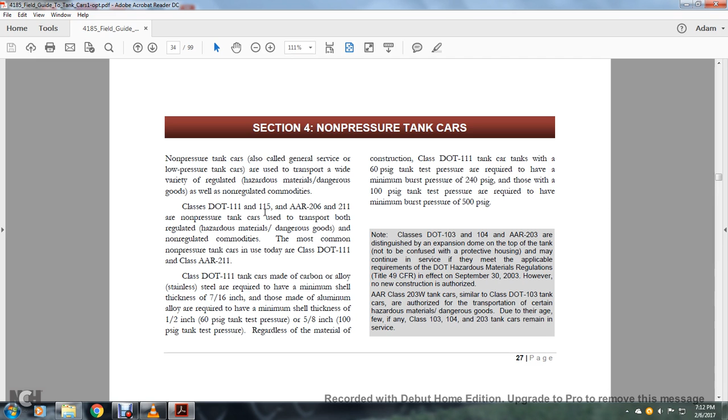Association of American Railroads Class 203W fusion welded tanker cars, similar to Class DOT 103 tanker cars, are authorized for transportation of certain hazardous materials and dangerous goods. Due to their age, few, if any, Class 103, 104, and 203 tanker cars remain in service.

Association of American Railroads Class 211 tanker cars are similar to Class DOT 111 tanker cars, but certain exceptions must be built according to the applicable Department of Transportation Canada specification AAR 211A100W1, or the tanker car must be built to meet the requirements of specification DOT 111A100W1. The main difference between the AAR tanker car and its DOT specification counterpart lies in these requirements.

Classification AAR 211 tanker car tanks require only partial post-welded heat treatment at the time of construction. Class DOT 111 carbon alloy steel tanks with welded attachments must be post-weld heat treated as a unit. Tanks made of aluminum alloy are not allowed to be post-weld heat treated.

Class AAR 211 tanker car tanks constructed with carbon alloy steel do not require radioscopic examination of welded joints. However, welded joints on aluminum tanks must be examined. Additional special fittings on the AAR cars are included to meet user needs.

Non-pressure cars have low-profile manway nozzles on the top of the tank, equipped with a gasketed hinged bolted manway cover. The cover is opened for loading and unloading and for access into the tank for maintenance. Other styles of manway covers, such as those on sulfuric or hydrochloric acid tanks, are semi-permanently attached to the manway nozzle and/or equipped with a smaller gasketed hinged bolted fill hole with a cover that opens for loading and unloading.

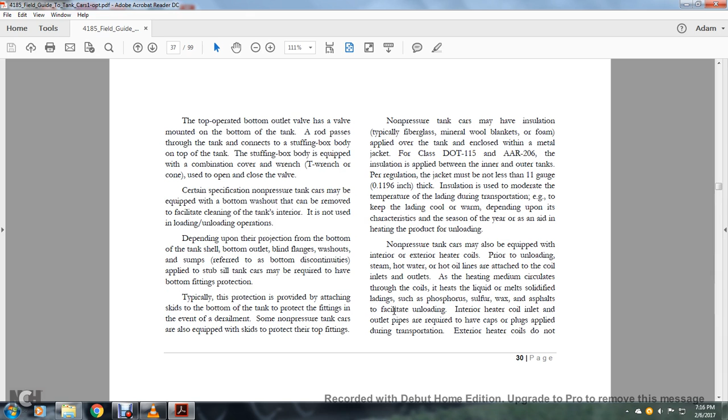See page 38. The top-operated bottom outlet valve has the valve at the bottom of the tank. The rod passes through the tank and connects with the stuffing box body at the top of the tank. The stuffing box body is equipped with a combination cover, a T-wrench, and a cone used to open and close the valve.

Certain specification non-pressure tank cars may be equipped with a bottom washout that can be removed to facilitate cleaning of the tank's interior. It is not used in loading and unloading operations.

Depending on their protrusion from the bottom of the tank or shell, bottom outlet, blind flange, washout, and sumps, referred to as bottom discontinuities applied with the stub sill tank cars may be required to have bottom fitting protection. Typically, the protection is provided by attaching skids to the bottom of the tank, protecting the fittings in the event of derailment. Non-pressurized tank cars are also equipped with skids to protect fittings from the top.

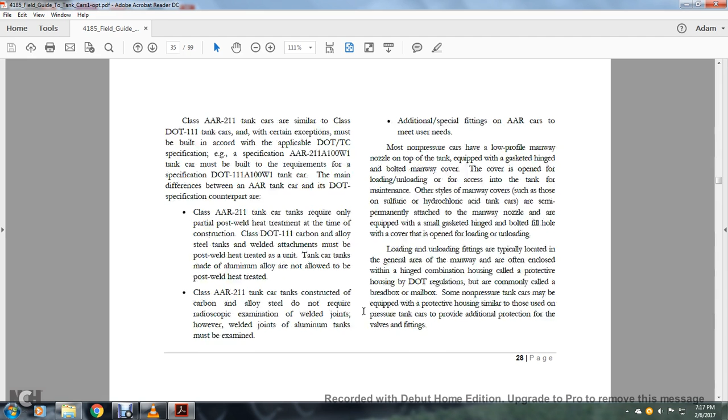Non-pressure tanks may have insulation, typically fiberglass, mineral wool blankets, or foam applied over the tank and then closed with a metal jacket. For Class DOT 115 and AAR 206, insulation applied between the inner and outer tank per regulation with the jacket may not be less than 11 gauge thickness.

Insulation is used to maintain lading temperature during transportation, keeping the lading cool or warm depending upon the characteristics and season of the year, and also as an aid for heating the product for unloading.

Non-pressurized tanks can also be equipped with exterior heater coils prior to unloading. Steam, hot water, and hot oil lines attach to the coil inlet and outlets. The heating medium circulates through the coils and heats the liquid or melts solidified lading.

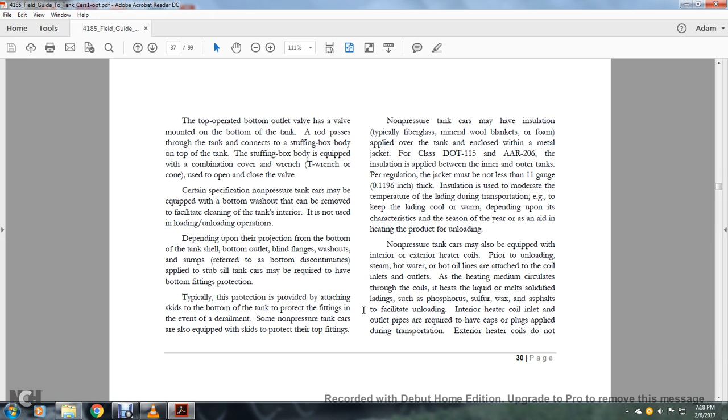For phosphorus, sulfur, molten wax, and asphalts to facilitate unloading interior heating coil inlet and outlet pipes are required to have caps and plugs applied during transportation. Exterior heater coils do not require caps. The car must be stenciled: exterior heater pipes, no inlet or outlet pipe caps required.

Some non-pressure tanks are equipped with electrical resistance heater systems in place of heater coils.

Non-pressure single-unit tank cars may be divided into two compartments by inserting ellipsoid heads into the tank shell. Heads must be concave at the lading of each compartment, or by joining separately constructed tanks to make a single car structure.

Each compartment will have its own loading and unloading fittings and pressure relief device. These compartments must be identified numerically, beginning with the B end, the end of the car with the handbrake wheel, and numbered consecutively toward the A end without the brake wheel.

Note that unlike highway cargo tanker cars, tank car compartments are not constructed by applying interior walls within a single tank. Further, unlike some cargo tanker cars, they do not have interior baffles to control lading surges.

Your Class DOT 115 and AAR 206 non-pressurized tanks have interior container tank construction with carbon steel, alloy stainless steel, manganese molybdenum steel, or aluminum inner tank supported within an outer shell tank that is not jacketed.

The annular space between the inner tank and the outer tank contains insulation. These cars are commonly referred to as tank within a tank, as the outer shell tank is constructed in the same manner as the tank of the car. The outer tank is not merely a metal jacket covering an insulated tank.

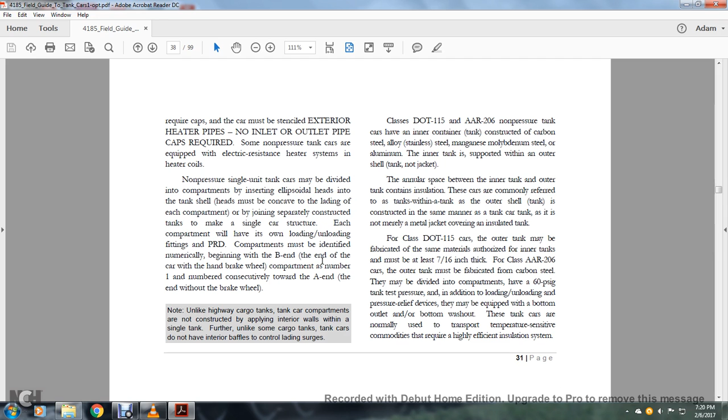They may be divided into compartments having 60 psig tank pressure, with additional loading and unloading and pressure relief devices. They must be equipped with a bottom outlet valve and/or bottom washout. These tank cars are normally used in transporting temperature-sensitive commodities requiring high-efficiency insulation systems.

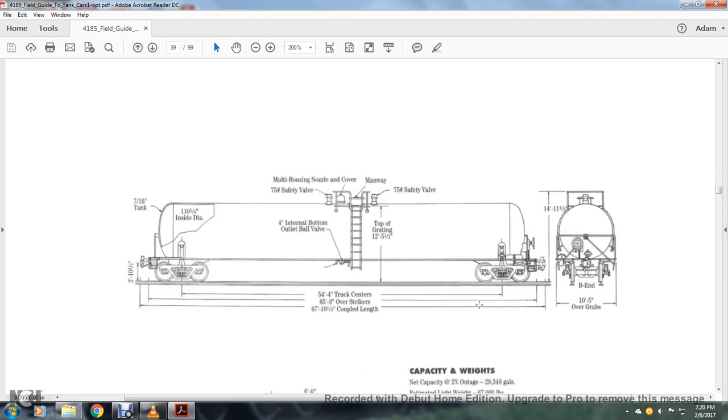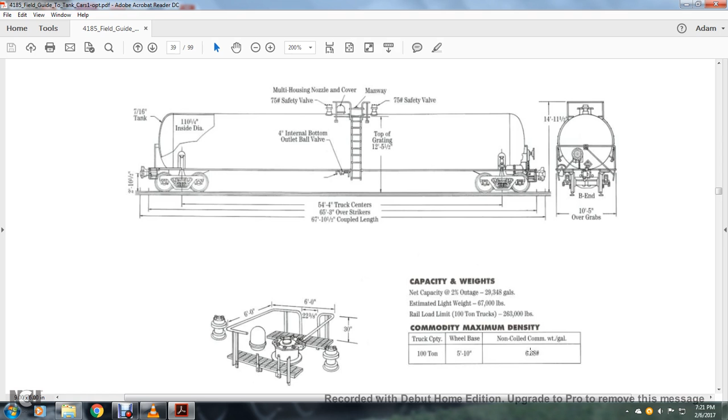Capacity and weight: net capacity at 2% outage of 29,348 gallons. Estimated light weight 67,000 pounds. Railroad load limit 100-ton trucks, or 263,000 pounds. Commodity maximum density, truck capacity 100 tons. Wheelbase 5 feet 10 inches, nominal. Weight of the gallon 6.68.

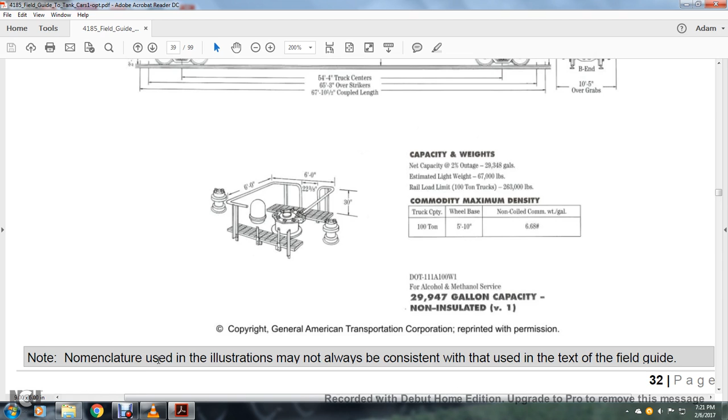Note that nomenclature used in the illustration may not always be consistent with that used in the text of the field guide.

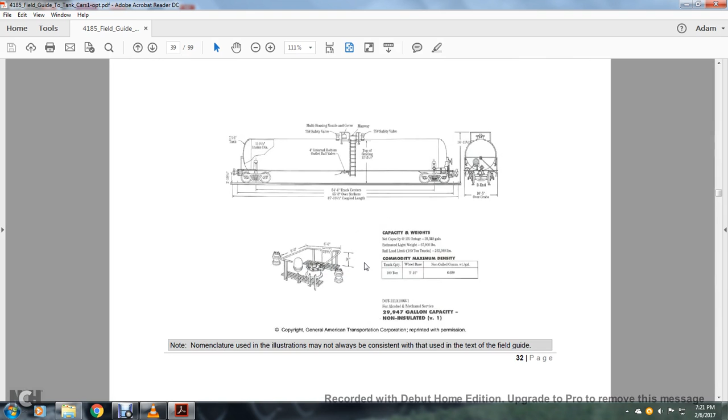And I'm going to go back to... and then we're going to zoom in on this.

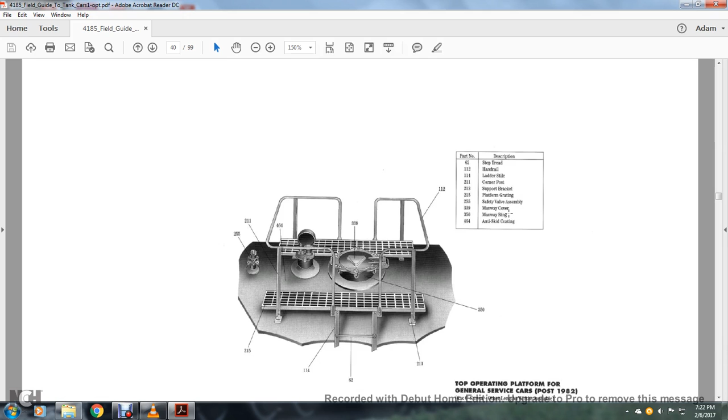62 is a step tread. 112 is a handrail. 114 is ladder stile. 211 is the corner post. 213 support bracket. 215 platform grating. 255 support safety valve assembly. 339 manway cover. 350 manway ring. 464 anti-skid coating.

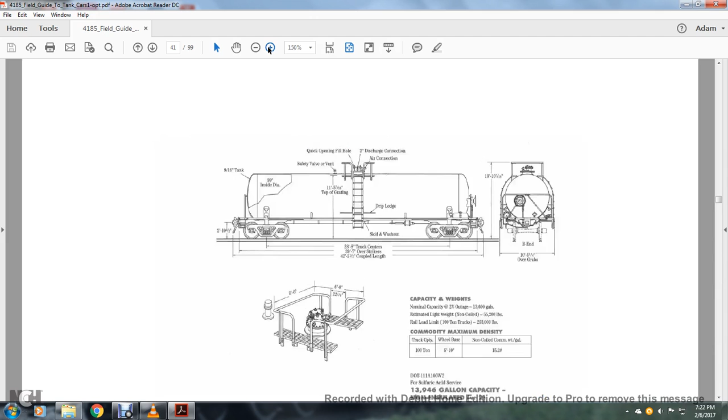Another picture. This shows the 9/16 of an inch tank, the truck centers, overstrikes and coupled lengths, drip ledge, skid washout, top of the grating, the safety valve and the vent, quick opening fill hole, 2-inch discharge connection, air connection, drip ledge, and your side B end over grabs.

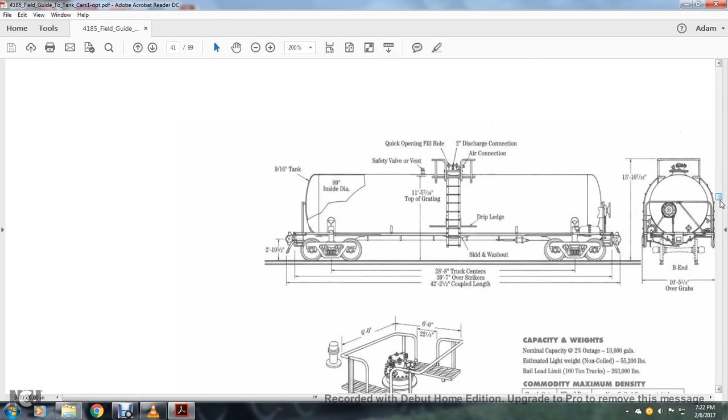Your capacity, nominal capacity, estimated light weight, rail load limit, 100 tons, 510, 16.25, sulfuric acid, 13,946 gallon capacity, non-insulated version 2.

You have 32 is your eye bolt, 112 is the handrail, 211 is the corner post, 213 support bracket, 215 platform grating, 263 safety vent assembly, 276 1-inch air connection valve, 292 washing pipe, washout plug, 350 flued manway nozzle, 377 8-inch fill hole cover, 406 washout nozzle flange, 453 pipe guide, 454 eduction pipe, 458 pipe cap, 459 tell-tale plug and chain, 460 street elbow, 464 anti-skid coating, 719 O-ring, 723 gasket.

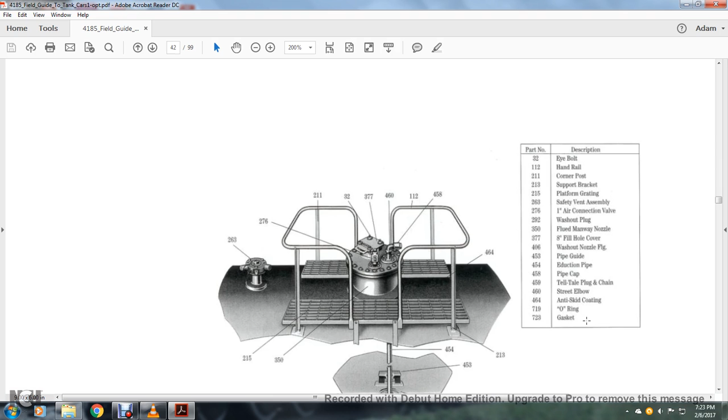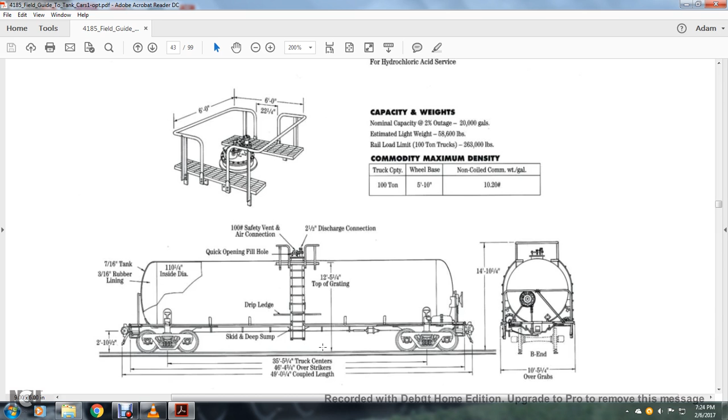Here's your grade around the valve. 100 pound safety vent and air connection, 2.5-inch discharge connection, quick open fill hole, drip ledge, top of grating, skid and deep sump, 110-inch and about 110 quarter-inch diameter, 7/16-inch tank, 3/16-inch rubber liner, truck center overstrikes and coupled lengths, over grabs B end of the car.

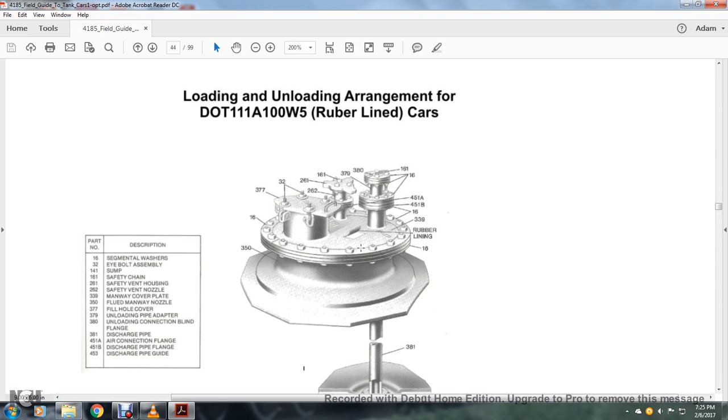16 is a segmental washer. 32 is an eye bolt assembly. 141 is a sump. 161 is a safety chain. 261 is a safety vent housing. 262 is a safety vent nozzle. 339 is a manway cover plate. 350 is a flued manway nozzle. 377 is a fill hole cover. 379 is an unloading pipe adapter. 380 is an unloading connection blind flange. 381 is a discharge pipe. 451 is a, 451A is an air connection flange. 451B is a discharge pipe flange. 453 is a discharge pipe guide.

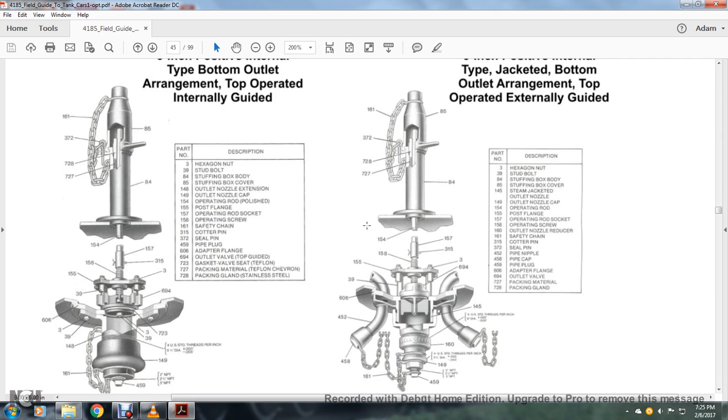727 packing material Teflon chevron. 728 packing gland and stainless steel. Your 6-inch positive internal type of the jacketed bottom outlet arrangement top of the operated external guide.

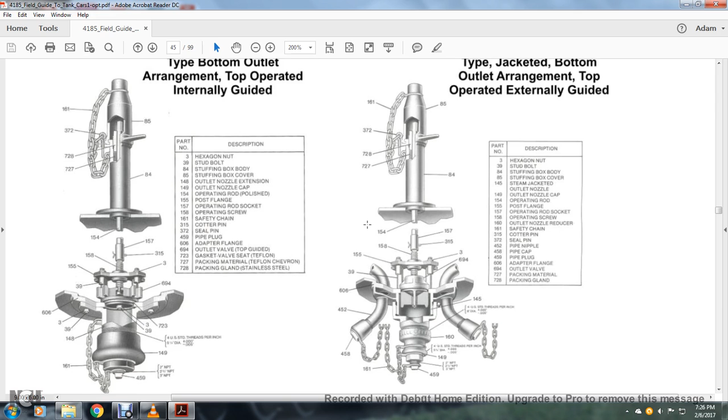3 is a hexagon nut. 39 is a stud bolt. 84 is a stuffing box body. 85 is a stuffing box cover. 145 is a steam jacket outlet nozzle. 149 is an outlet nozzle cap. 154 is an operating rod. 155 is a post flange. 157 an operating rod socket. 158 operating screw. 160 outlet nozzle reducer. 161 safety chain. 315 cotter pin. 372 seal pin. 452 pipe nipple. 458 pipe cap. 459 pipe plug. 606 adapter flange. 694 outlet valve. 727 packing material, and 728 packing gland.

Or your bottom outlet with the skid protection. You have your ball and your seals to the ball, and then around the body, underneath the tank shell with a cast steel saddle, the shear plane with a nozzle in the cap, and the lock pin for the handle in the open position. Shaded area is the area illustration indicates the valve moving parts.

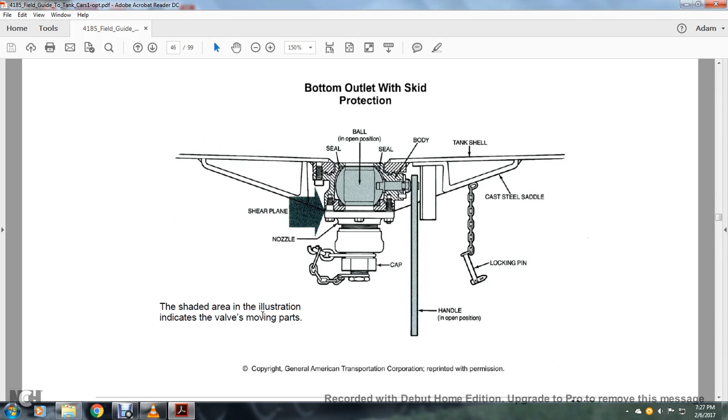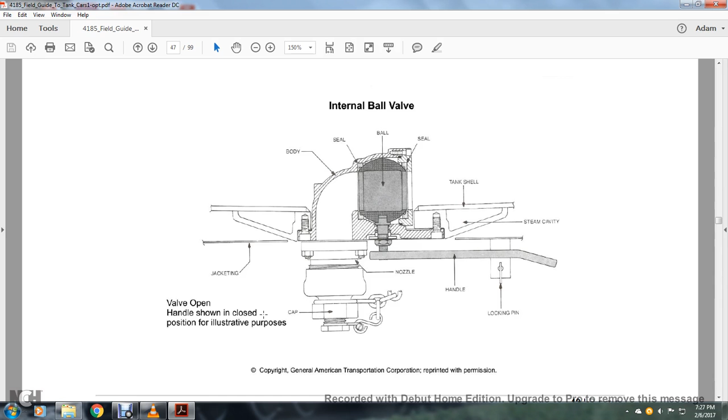An internal ball valve. Valve open, handle shown in closed position illustrated purpose. At the top you have your ball, your body, your seals, your tank shell, the steam cavity, a handle, a locking pin, a nozzle, and a jacketing and a cap.

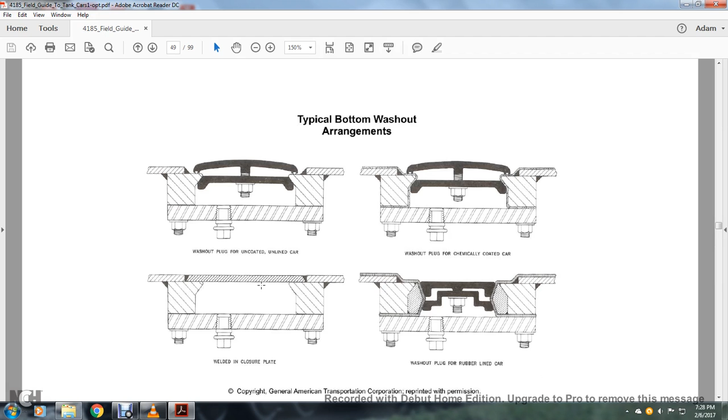Or your pressure relief valves. Your internal valves, starting at the left, going down the line. A, top guide. B, valve stem. C, O-rings. D, seal. E, body. F, mounting flange. G, gasket. H, spring. I, spring guide. And J, adjusting nut. To the left of your external valve, A cap.

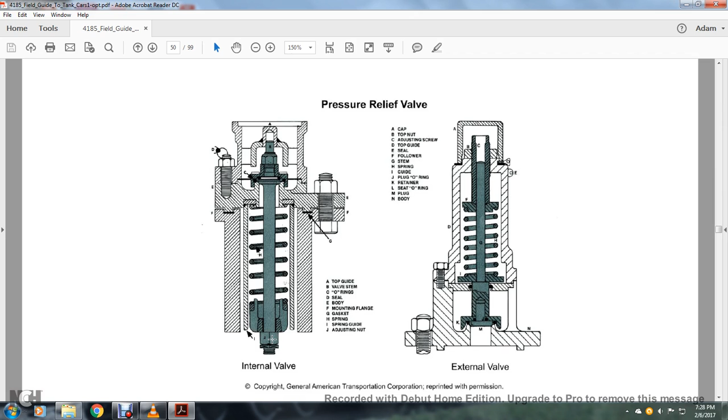B, top nut. C, adjusting screw. D, top guide. E, seal. F, follower. G, stem. H, spring. I, guide. J, plug O-ring. K, retainer. L, seat O-ring. And M, plug and N, body.

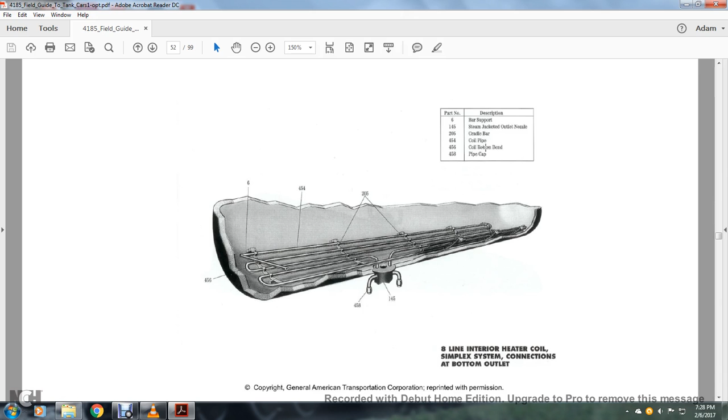This shows the 8 line interior heater coil with the simplex system connections at the bottom outlet. You have your bar support, steam jacket outlet, nozzle, cradle bar, your coil pipes, coil return bend, and pipe cap.

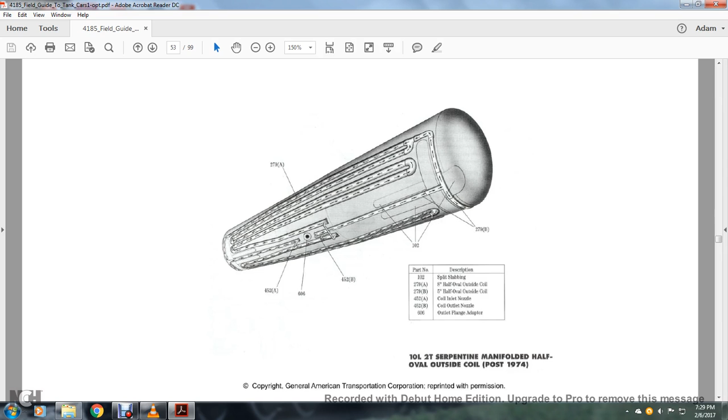Or your 10L 2T serpentine manifolded half oval outside coil, post 1974. 102 is split slabbing. 279A is 5-inch half oval outside coil. 279B 5 inches full half oval outside coil. 452A coil inlet nozzle. 452B coil outlet nozzle. 606 outlet flange adapter.

Section 5, pressurized tank cars.